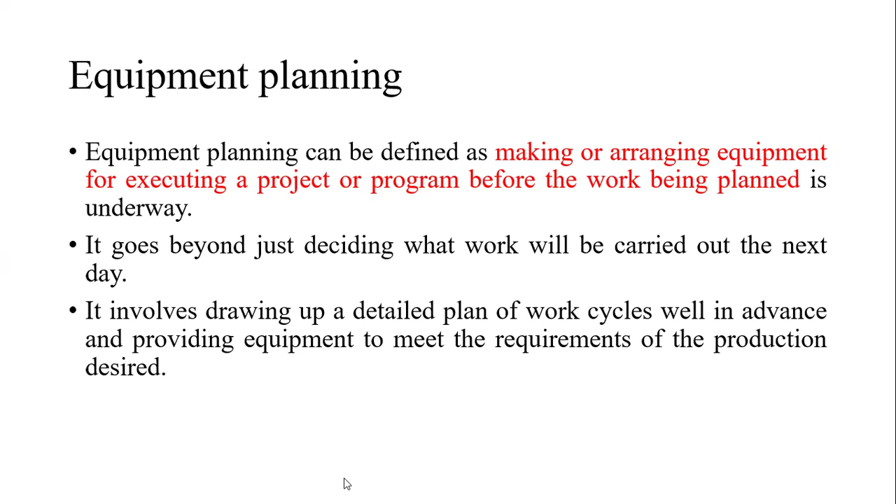At the same time, during the initial stage of the project, it is not mandatory to bring all the equipment to the construction site. Why? Because at the initial stage, the work will be very slow, and only a few manpower is required for executing the work. Based on the speed of the construction project, the machinery which is required can be brought and utilized for the work in the later phases.

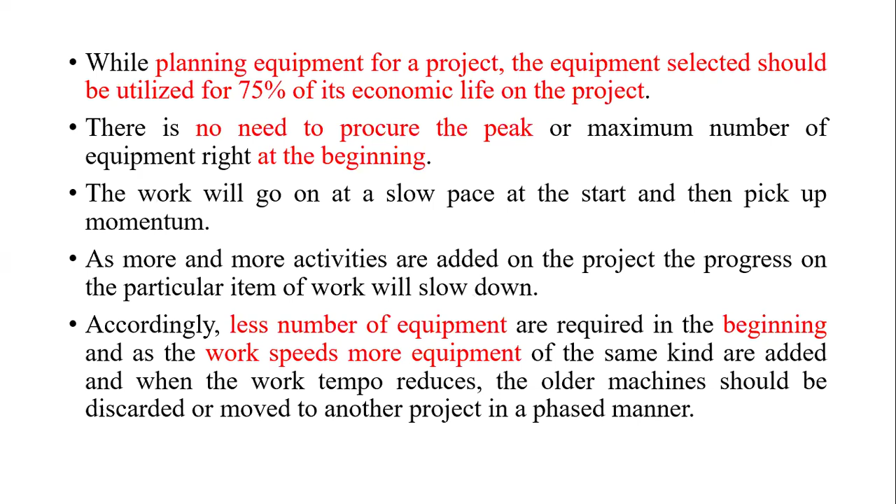Next, we'll be seeing about selection of equipment. Before selecting the equipment for your construction activity, we have to follow some guidelines. First, based on the economic value of the project, you have to decide what type of machinery you are going to use for the particular work. Also, you have to select the equipment based on your area of expertise. Before buying a machine for your project work, you have to get some information from the experts, so that the machine can be utilized throughout the project.

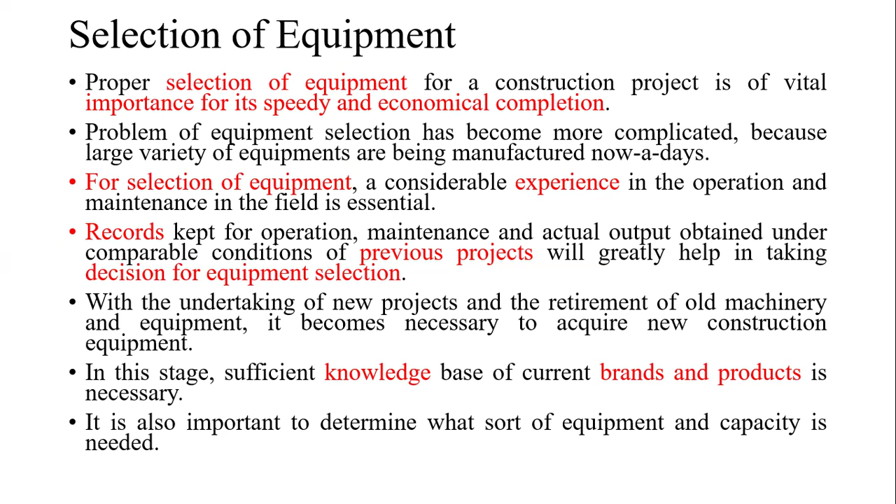Then additionally, you should not procure any second-hand machines. Why? Because it will lead to problems during the execution of the work, which leads to delay in the construction activities and increases the cost of construction. Once you identify the machine, you have to decide whether you're going to buy it, rent it, or lease it for a particular period. This depends on the economic value of the project.

If the economic value of the project is much higher, then you can buy a machine, so that it can be used for all upcoming future projects. If the value of the project is medium, you can rent it. For example, you can take it on a daily basis and pay the amount at the end of the day.

Or else you can go for lease. Lease means you can get the machine for a particular duration, for example, 1 month, 1.5 months or 2 months, based on your need. Within that duration, you have to use the machine to the fullest for successful completion of your project.

Then common factors. Now we are going to see the common factors which affect your selection of equipment. The first one is your scope of work: what type of work you are going to do, and what kind of machinery is required for that work. Based on the work, machines should be selected and employed. And the second thing is labor availability.

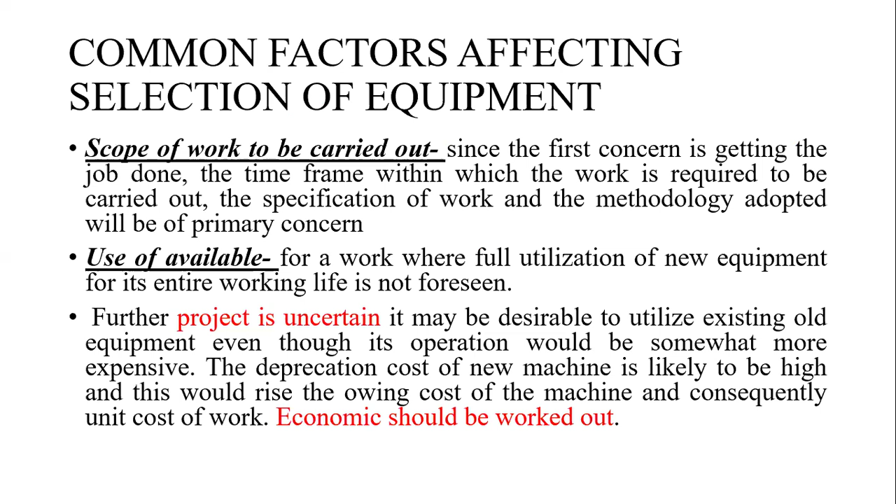And next comes the suitability for job condition. Based on your site condition, this comes your site condition. Generally, India is a tropical country. We can expect sudden rain, sudden wind, and so on. So therefore, we have to take proper precautions to protect the machineries from the extreme climate, so that our work will also be continued without any disturbances.

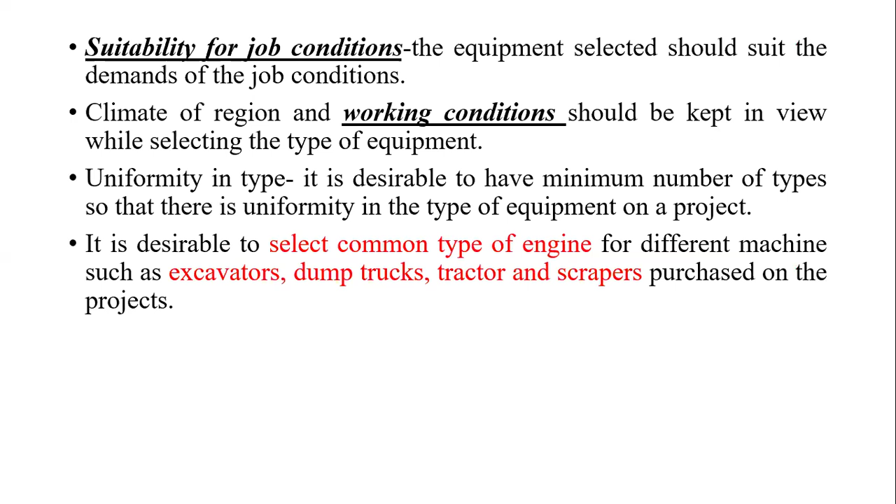Okay. And next comes the size of equipment. In general, large scale machineries have the tendency to produce higher outputs. Meanwhile, they have a higher initial cost. The initial cost of the machine is due to transportation. That is nothing but shipment of your machines from one particular location to another location.

So during the initial stage of the project, I mean the construction work, large scale machineries can be avoided and small scale machineries can be employed for the starting of the project. And I'm not saying that large scale machineries are not required for the project. They can be utilized, but whenever needed, you can choose them based on your requirements.

Then next comes the use of standard equipments. Standard equipments is nothing but usage of well-known machines. For example, if you are going to use any foreign based machines, then in some cases that machine gets corrupted and it will get stuck in some parts. So the machine has to be repaired so that the work will not be stopped.

In those cases, you will not be able to find the spare parts easily in the local market. So you have to choose a machine in which all the spare parts as well as all the things are commonly available, so that if there is some emergency, you can buy all those spare parts and you can run the project without any delay.

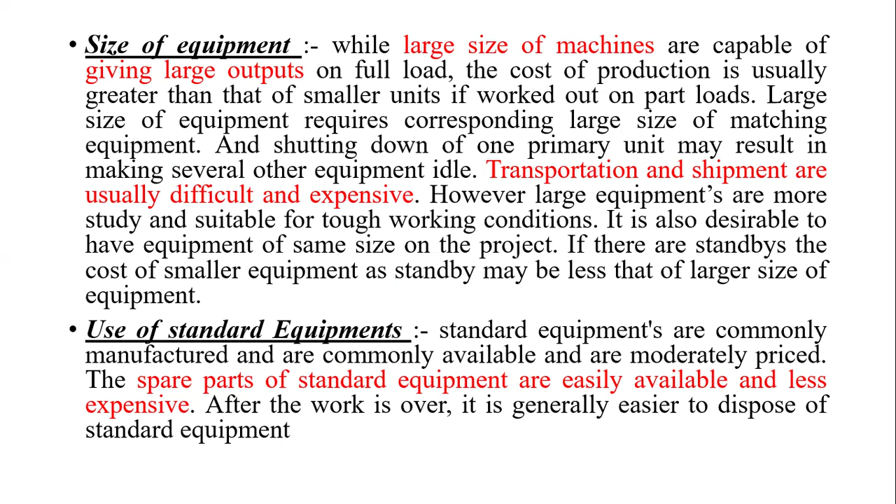Then comes the unit cost production. Unit cost production is nothing but cost of machine. See, cost of machine plays a major role. If you are a big firm, then obviously you can buy large scale machines or small scale machines because you have so much money. Whereas if we are going to start a project now, since you are a young budding entrepreneur, you have to go for rental basis machines or equipments initially.

Then if your firm is growing day by day, then you can procure machines for your company. The machine can be paid for by the company. So based on the project cost involved, you have to choose what type of machines you are going to use for the particular project.

Then comes the country of origin. As I said previously, if you are choosing foreign based machineries, you have to be careful. Why? Because in some cases you will not be able to get the spare parts or some other electronic devices which help the machine to run continuously. So based on the availability of spare parts, materials and other components of your machineries, you have to select the machine for the construction activities.

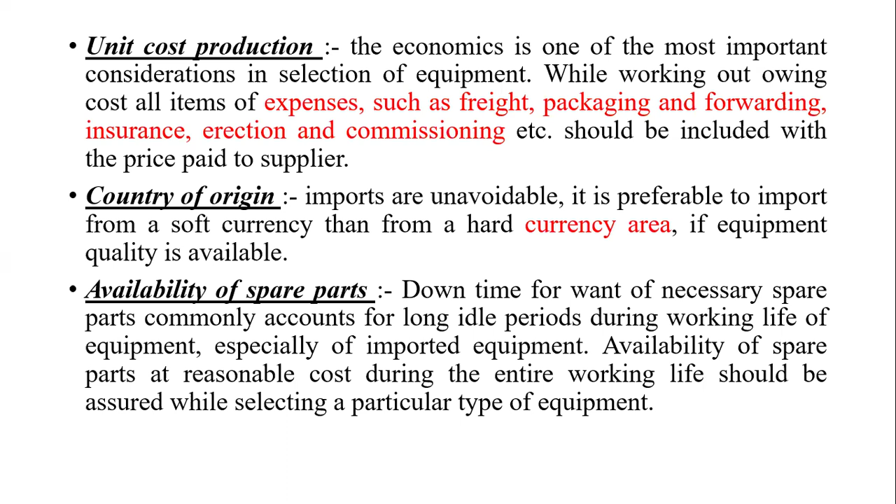Then comes the versatility. Versatility means usage of machine for different purposes. For example, if you buy a machine for one purpose, it can be utilized for different purposes. Say, for example, your JCB. JCB is mainly intended for excavating the soil. Moreover, it can be utilized for lifting weights also. In buildings, more weights will be there, for example, steel sections. So this JCB will be quite helpful for lifting the steel section from the ground floor to the first floor, or to some other places where you want.

Next comes the selection of manufacturer. As said earlier, you have to be careful before selecting the machine for buying or on a rental basis. Why? Because quality matters here. Selection of manufacturer is also quite important. Why? Because top brands like Mahindra, Caterpillar, and so on have longer lives, and also the spare parts will be available globally. So if there is any problem or complaint, we can call the repair team from the manufacturing factory and get the machine ready for future works. So selection of manufacturer is also very important.

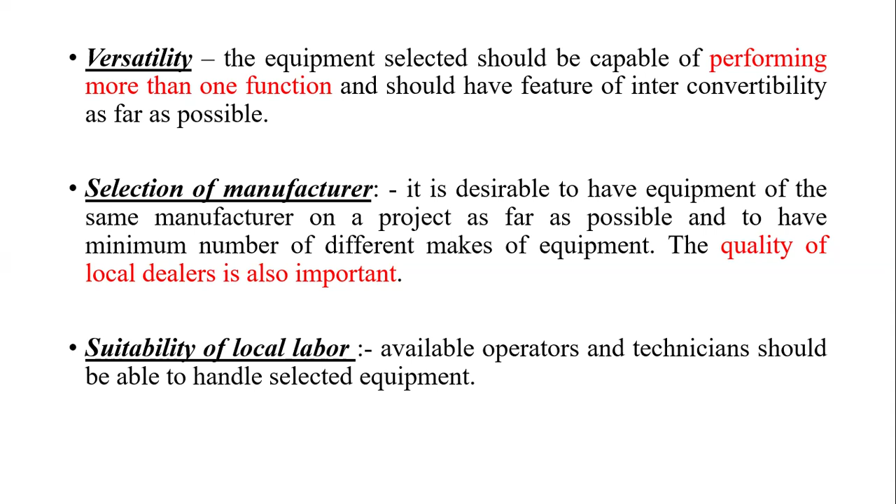And finally, suitability of your local labors. Once you buy the machine, you have to train the local people first. Why? Because if no one is available for handling the machine, then it is entirely waste. The money invested for buying the machine is wasted. Therefore, proper training has to be given to the local laborers so that the work will not be delayed and will be completed as soon as possible.

Then finally comes the technical consideration. Technical consideration in the sense the performance of your machines. For example, strength of the machine. Then comes the rigidity, how rigid it is. Then vibration stability. Then resistance to wear, heat resistance, reliability, and maintainability. Maintainability is nothing but how the machine is going to perform in the long run.

So if the machine performs for only a short run, then the machine is useless, and automatically the money you have spent for the machine is wasted. So you have to be careful that the machine can run for a long run, so that you can perform multiple projects with the same machines, so that the cost involved in buying the machinery can be effectively utilized, and in the upcoming projects you can save money. Okay, thank you.